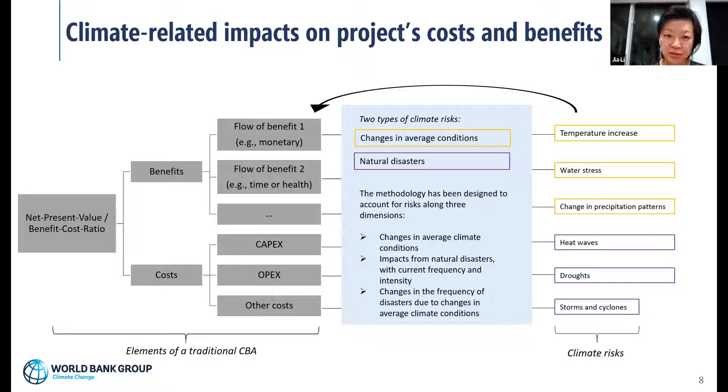All right, so this is just a quick flow chart that goes through the steps for the stress testing. Our starting point, as I mentioned earlier, is really the baseline economic analysis.

In analysis, oftentimes we do consider different assumptions, looking at an optimistic set of assumptions versus pessimistic, and evaluate the project's financial flows, costs, and benefits. And then we identify what are the climate risks and impacts and potential natural hazards that affect the project in this location that you will be developing.

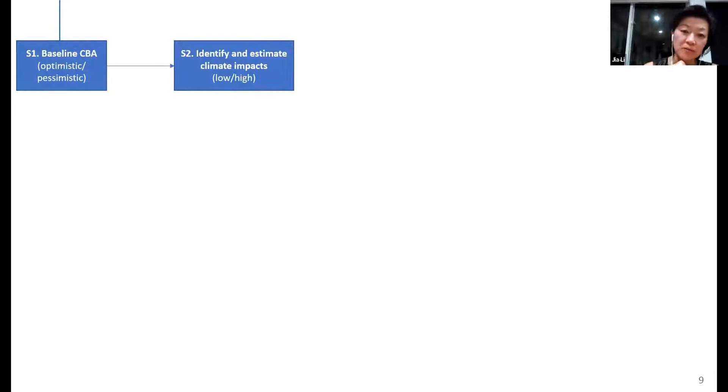Here we also consider a set of potential outcomes where the climate impacts can be low or high. As we look into the future, there are many factors that could impact the climate trajectory, including what countries are doing with their mitigation, and also socio-economic development and other aspects we can talk about. I will talk about the data assumptions we use for that type of analysis.

And then we calculate based on the climate impacts to the project cost and benefit categories. We calculate revised net present value or other criteria for evaluating projects for all the scenarios.

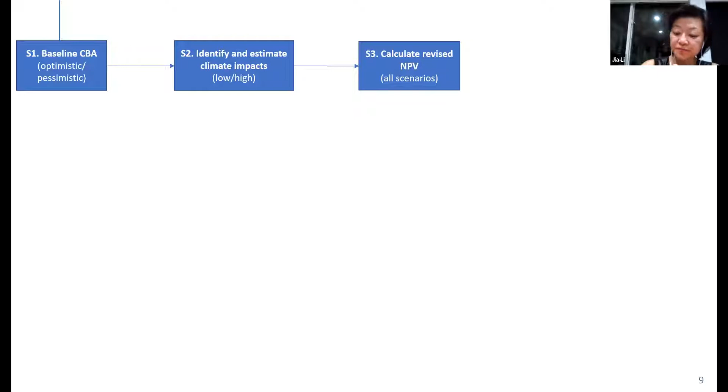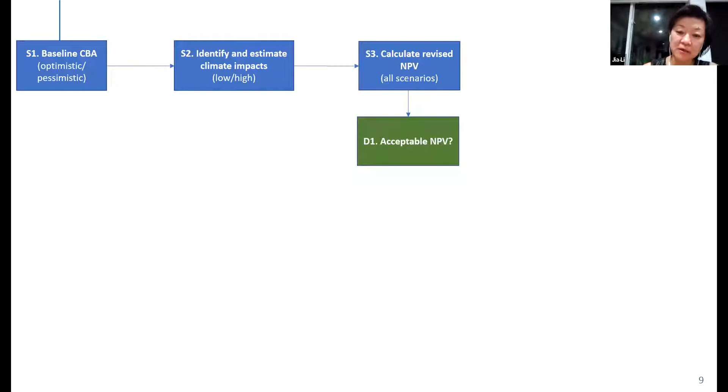And then we can do another set of evaluation to say, well, is this economic outcome acceptable? If it is, then we would conclude that the risks are acceptable when we consider climate change and future disasters.

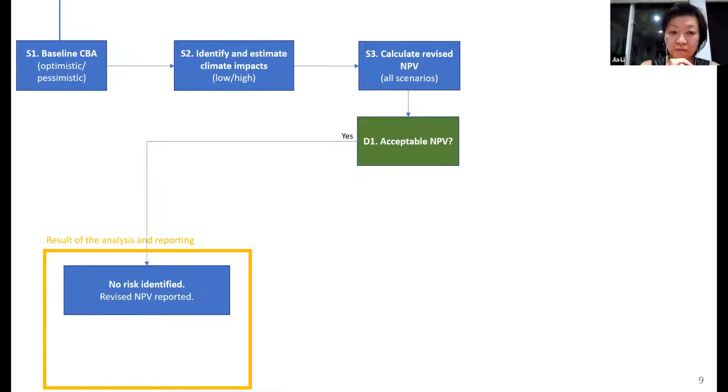And then at this point we will report the revised NPV and go on to the next steps of the project evaluation or design. And if the revised economic analysis shows that the outcome is not desirable, then we want to do further analysis.

To look at what are some of the scenarios that would actually cause the project to fail, and what are the potential consequences, and are these scenarios considered to be plausible, or the consequences significant enough that will require revision of the project.

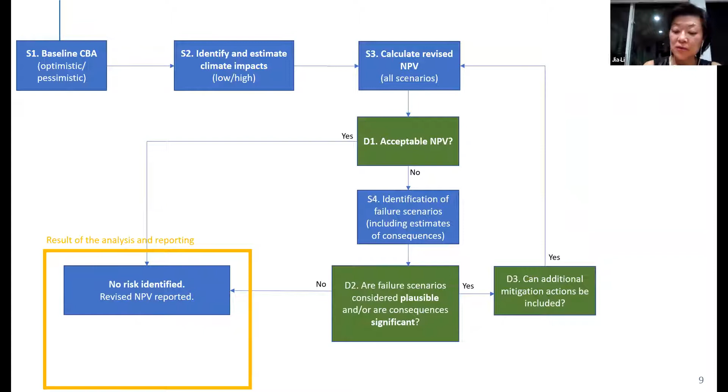So if the outcome is considered to be undesirable, then we want to go back to the design phase to reevaluate the project design. It could be the engineering standard, it could be the site selection, and consider the alternatives. And at that point, we will redo the analysis to evaluate project outcomes and go through this decision tree again.

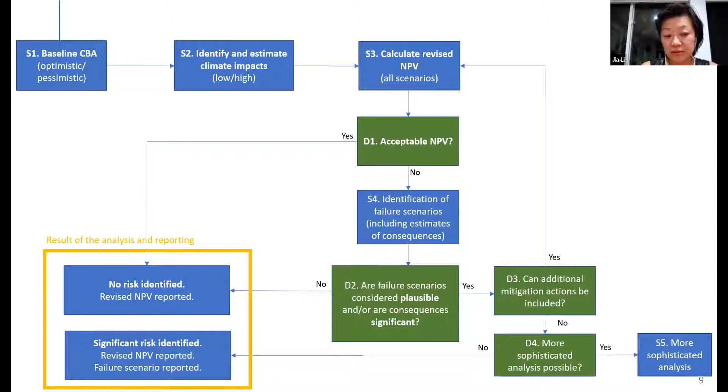So at some point, there could be significant risks being identified for the project, and in this case we might want to consider doing more sophisticated analysis. For example, for some of the large hydropower projects, there may be a need to do sophisticated decision-making under uncertainty type of evaluation, looking at a wider range of scenarios.

And we can also talk about that. That's not part of this methodology, but we do have additional methods being developed for considering more complicated cases as well.

All right, so we have the risk stress testing guidance note. We also have developed an accompanying simplified Excel-based tool to actually conduct stress testing for projects. This tool is a useful template or starting point to consider climate risks. It's possible your project has already been developing methods, tools, and data.

I'm sorry, there's a cat getting up very early.

But the template could be a useful starting point to consider different categories of climate change and disaster risks. And we do have a link in the presentation that shows you where you can find the tool and some of the training videos as well, that might be of interest.

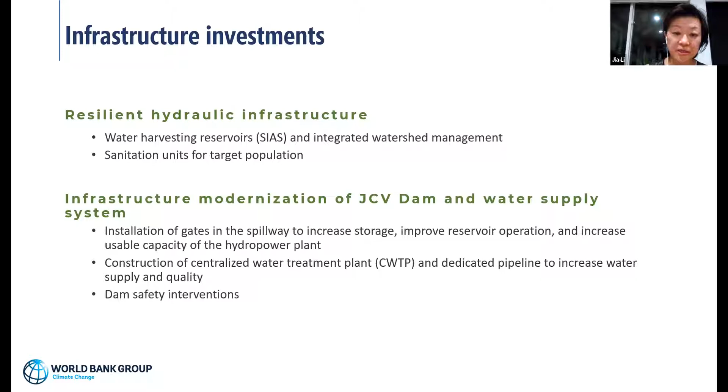So the infrastructure project has different components, and the project team already conducted their estimates of the costs and benefits. And so as a starting point, the baseline economic analysis considered both the optimistic and pessimistic scenarios.

And here we want to also consider climate then. So the climate risks for Honduras.

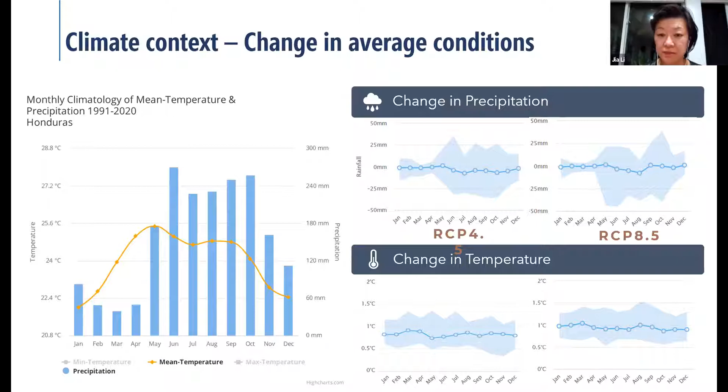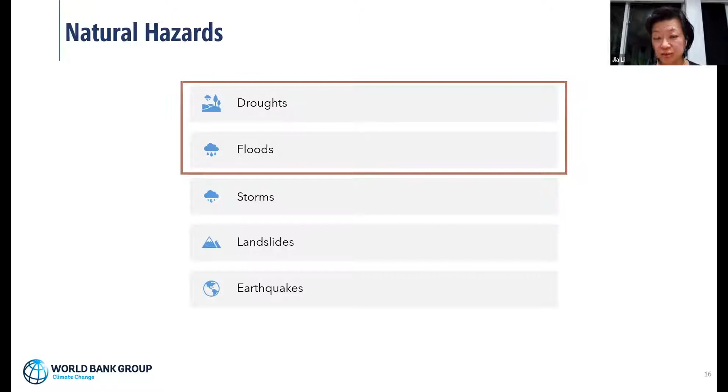So a lot of the information would be needed to support analysis. And for the natural disaster in Honduras, for the project site, we have major concerns about droughts and floods, so it is water variability.

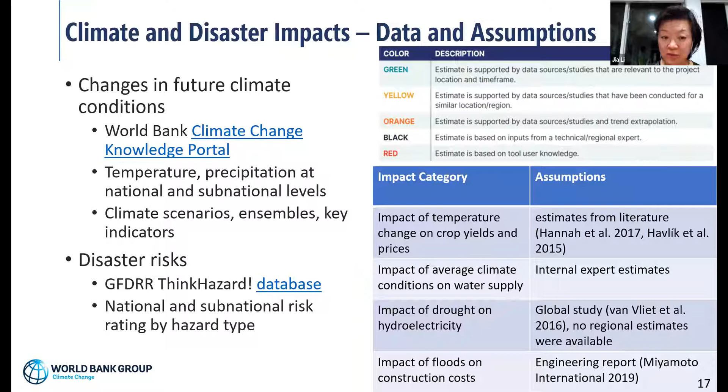And for disaster risks, the Global Facility for Disaster Reduction and Recovery has a really nice database called Think Hazard that really by country, for each country, there's a nice summary looking at the different level of disaster risks, which can be used to guide the analysis. So this exercise I'm showing is using data from both the Climate Change Knowledge Portal and Think Hazard.

So for changes in average conditions, we make a set of assumptions on what is the impact on the cost and the benefits, including the operating maintenance cost increase to the investment cost changes. And for the benefits, we also, as I mentioned, the set of assumptions we use to estimate potential changes in the project benefit flows from the income from agricultural production to irrigation, water availability and price,

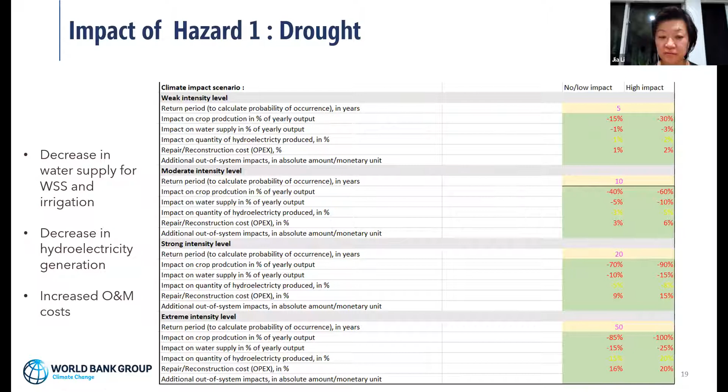So these are the assumptions being made. And this is looking to the future, when we project into the future, looking at the potential occurrence of disastrous events. We also have a set of assumptions that can be made in the tool to look at the impacts.

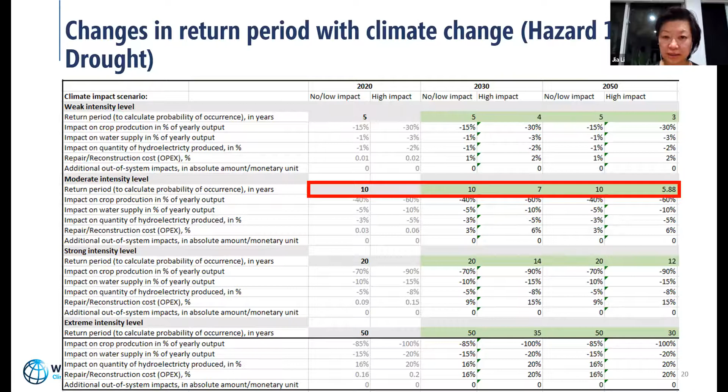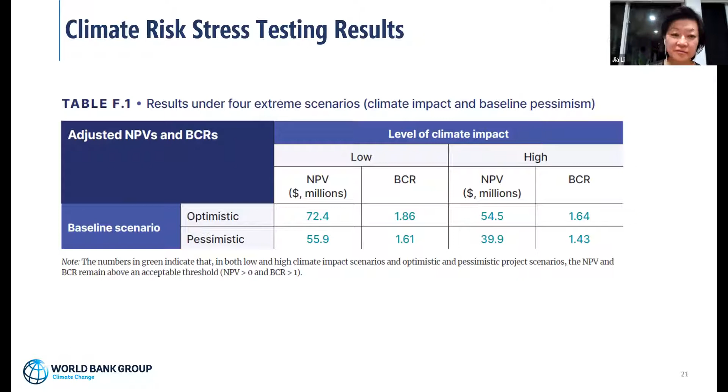So the tool can provide some analysis looking at the uncertainty space and where the project economics may become to be undesirable, which can help guide additional analysis and the project design modification.

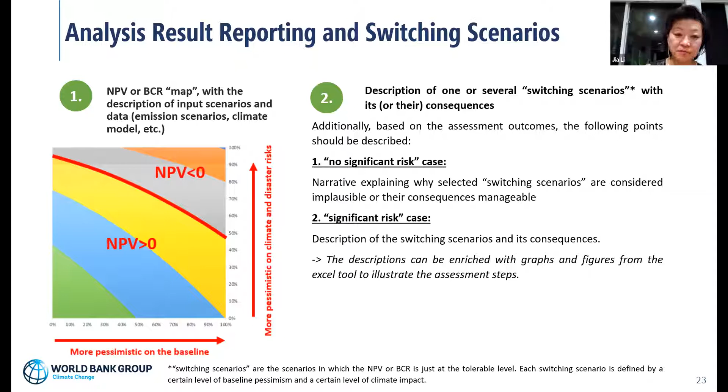Okay, I'm not sure how I'm doing with time because I couldn't see. Maybe David already sent me 5 messages to remind me.

So the key takeaway is there are large uncertainties in future climate potential events and their impacts. We don't know exactly how the climate will unfold, but what we do want to do is when we evaluate projects and do project design, we want the projects to be robust under any potential future conditions.

That's why there are benefits of doing stress testing to look at how the project will do under different conditions. We want to consider as wide as possible a range of future conditions to conduct the stress testing, and we also want to consider climate and disaster risks evaluation throughout the project cycle, from the beginning, from project design to analysis, evaluation, and also implementation, monitoring and evaluation.

Those are all very important because future conditions will not be stationary, and we want to make sure the whole project design is also adaptable, considering anticipated future conditions.

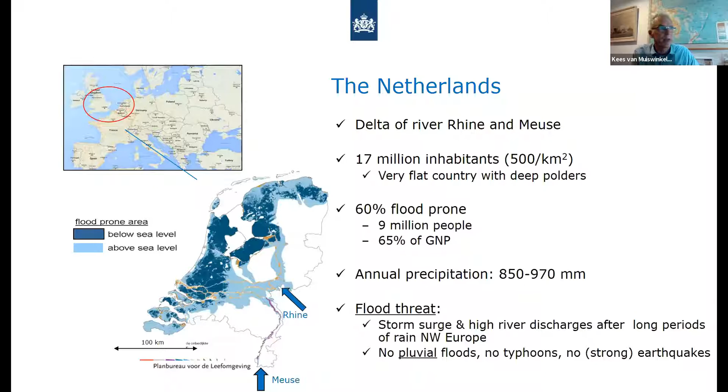We have been used to live with the water for ages and ages, and large parts of our country have been reclaimed from the sea, as you can see in the picture on the left, on the top. This also means that we have been used to floods, major floods, with a lot of losses.

And this led to some important projects. I will tell you a bit about that later. For example, in 1916 there was a major flood leading to the building of the Afsluitdijk, and we had the big flood in 1953, which led to our famous Delta works.

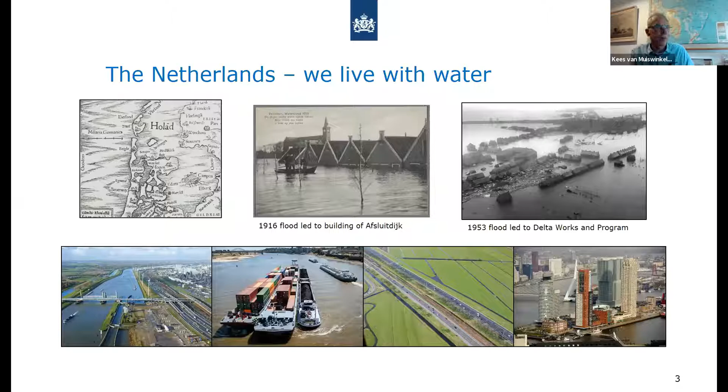But it's not only a challenge, we also love the water. We live with the water. It's very important for our economy, for the harbors and in shipping. And we also like to live along the water and have recreation. So it has two sides to it.

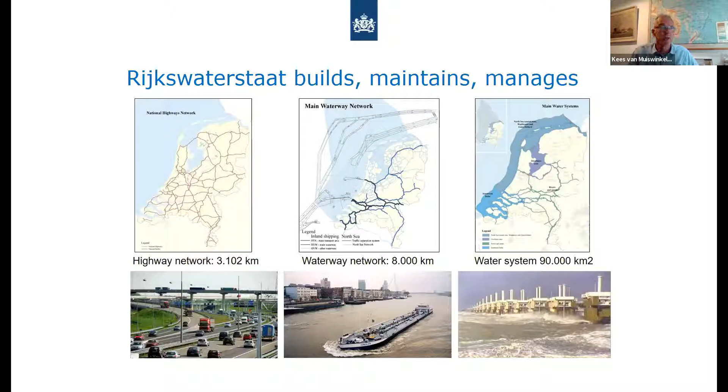I work for Rijkswaterstaat, which is the executive part of the Ministry of Infrastructure and Water Management in the Netherlands. We build, maintain, and manage the highway network, the waterways, and also the water systems, which include the storm surges.

While doing this, we have to deal with an uncertain future. We don't know how the economy will be, or politics. And we'll all agree that nobody could have predicted what the impact of, for example, the COVID epidemic would have been.

Also, mobility in general is evolving. There are a lot of technological developments also with mobility. And in some ways it can make us more dependent on electricity and telecom. That means we may also be more vulnerable to climate change, because that causes extreme weather.

So how do we deal with that in the Netherlands? Well, we have climate change adaptation policy, and I'll touch on that a bit. We have the Delta program, which obviously also came from this 1953 flood.

Very important is water safety, because we are largely prone to flood. We love to be safe, so we like to reduce risks. For water, this means we deal with storms, and also, obviously due to climate change, we have to deal with sea level rise and higher river discharges.

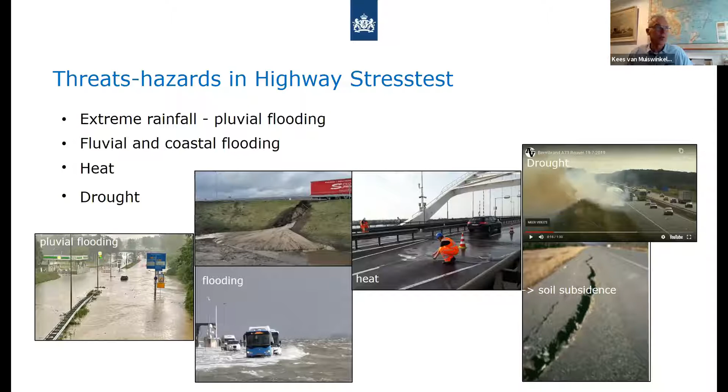For example, the effects of extreme rainfall, which can lead to flooding of the road, which you can see on the left, but also erosion of embankments, which can cause damage to our roads. The possible impacts of flooding, both from the rivers and from the coast. Heat - we had record heat last year, which caused problems with bridges that wouldn't close, meaning problems for both road traffic and shipping. Drought can lead to fires along the road, and in the long term will cause more soil subsidence, which also causes a lot of damage to our infrastructure.

So this is what we look at, and this leads to maps. It's great to have these stress test results, because at the beginning of a project, you know what the challenges are. We've also investigated different scenarios. So starting a project with these stress test results helps stakeholders think about these challenges and think about the measures.

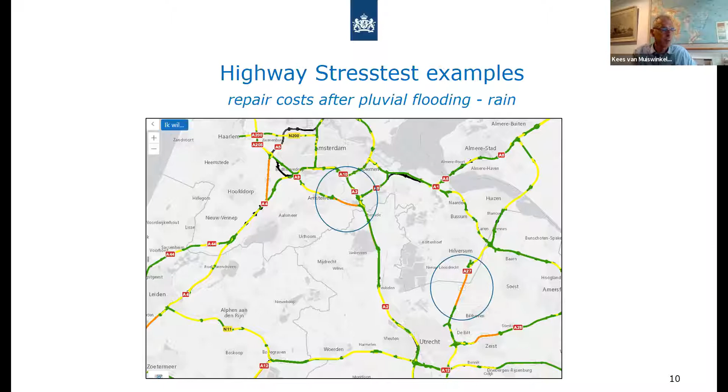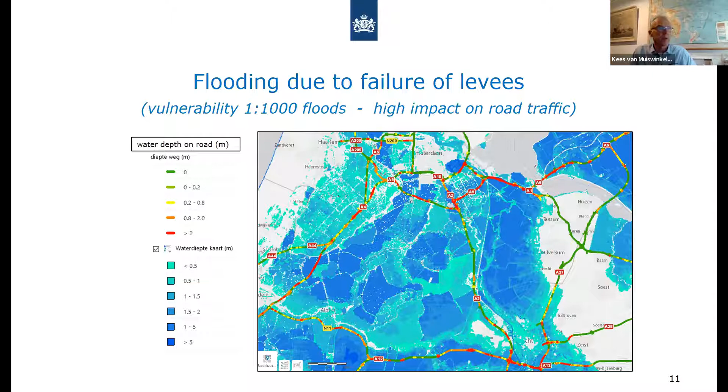I told you about these risk dialogues - with our limited budgets, we want to put our efforts where it's most important. So through the stress test and the assessment of risks, we like to focus on issues that have a high probability and a big impact.

For example, these steel bridges that wouldn't close due to heat have a huge impact, so we want to take measures focused on that. On the other hand, flooding on the roads happens a lot, but the impact is less big because it only happens for a couple of hours and the water just runs away. So the stress test and the dialogues help us make these choices.

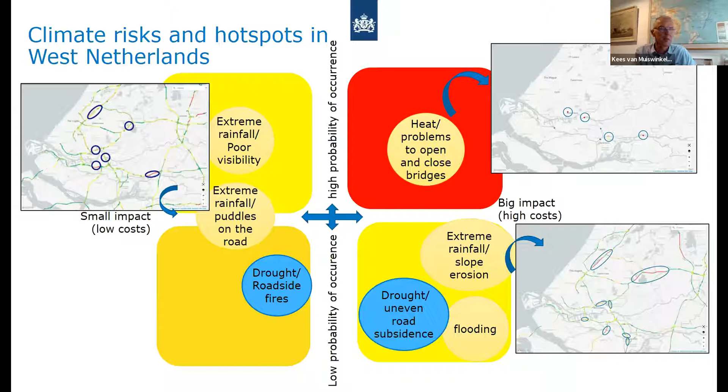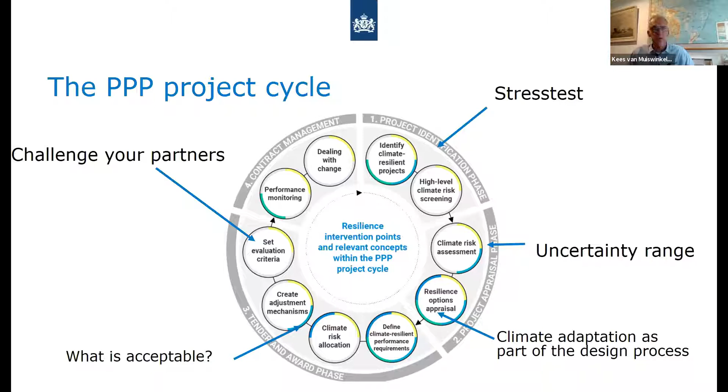Now, how does this relate to the PPP project cycle, which you can also find in the handbook you're studying this week? I'd like to tell you about this. I think this really shows how our system relates to this PPP cycle. I'd like to touch on some aspects of that.

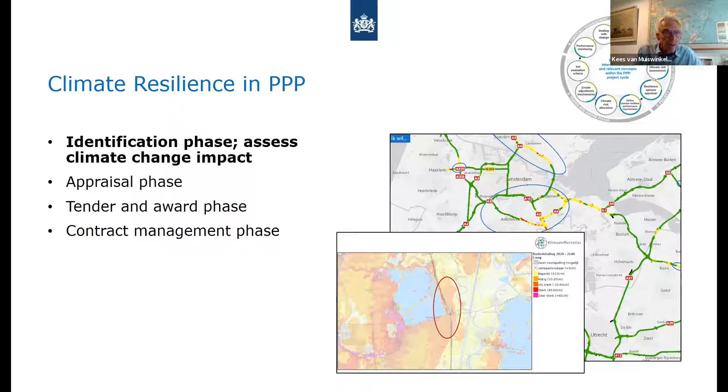Firstly, in the identification phase, the stress test helps show where the risks are. This doesn't mean there are no uncertainties - obviously there are - but by having the different scenarios in the stress test, this helps as input for the appraisal phase. Then next is the appraisal phase, where you actually look at what sort of challenges there are and what possible measures exist.

It's good to have best practices and lessons learned, and they are widely available. I think World Bank just told about that, but worldwide there are lots of best practices. It's really good to use these best practices, which will help you think of better solutions.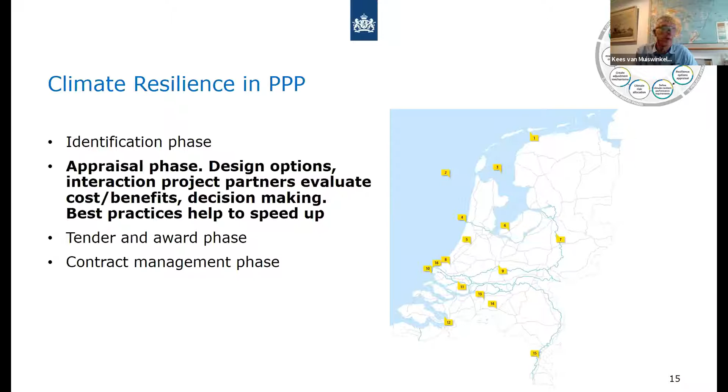In this map you can see Rijkswaterstaat iconic projects, which shows where projects take into account sustainability and climate change adaptation. I will tell you about some examples later on.

In the tender and award phase, it's important to challenge the contractors to innovate, to think about adaptive solutions. And it's very important to tell what will be the standards where you will evaluate the projects. So if you set these standards, this will help to achieve the goals you have set in the appraisal phase.

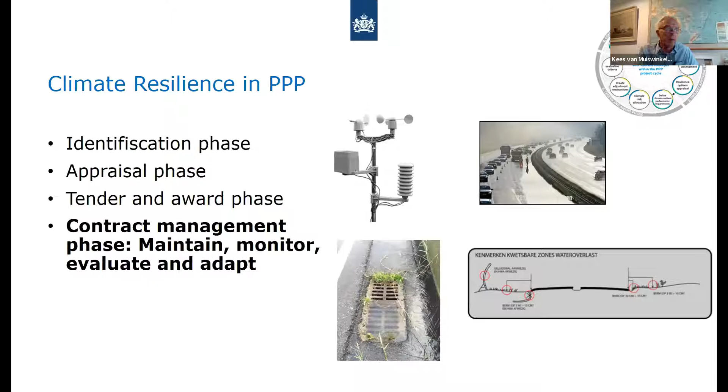Starting now, I would like to give some examples of how we take into account climate change adaptation in the Netherlands and how we deal with projects.

This is an example of the A1 motorway, which is very near to Amsterdam, a pretty part of the Netherlands, but also very busy. On the left you can see the old motorway with a bridge over the river, and you can imagine this caused problems for traffic - it was too narrow, so it caused a lot of traffic congestion. On the right you can see the detour of the motorway which was made without a bridge - they actually made an aqueduct with concrete under the river.

This obviously helps accommodate more traffic, but at the same time we took into account other interests like shipping - less obstruction for shipping - but also ecology. There's an ecological route on the lower part of the aqueduct, a part which is now used to accommodate all sorts of animals traveling by.

We also took into account climate change - we have more precipitation, so we designed to account for all the extra water that comes off the road. This also helps with water management of the area, because as you can imagine, all the fields you can see are actually below water level, so water management is very important. All these interests are taken into account in this project.

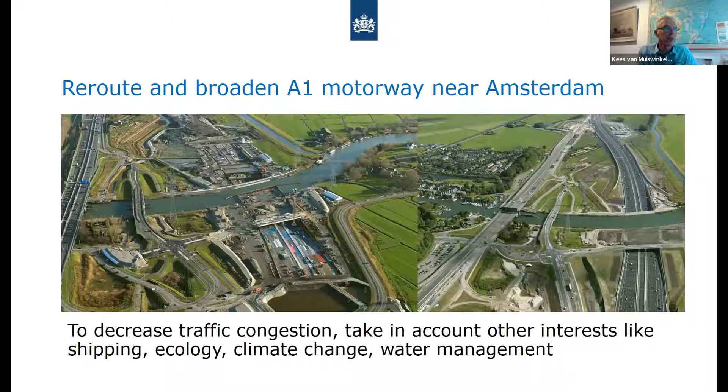Next, I will tell you about the Afsluitdijk project. It's a 32-kilometer long dike, which was built after the 1916 flood, and it has been protecting large parts of our country for 90 years now. But after 90 years, the dike needs regeneration to meet up to the safety standards.

By 2050, it has to meet the Water Act, which means it will have to accommodate a 1 in 10,000 storm. And because, as I told you, a large part of our economy is in flood-prone areas, we don't want to flood, so that's why we have these high standards.

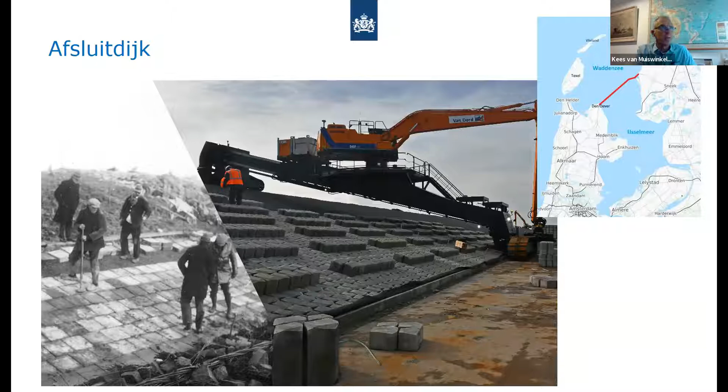So at the moment we are working on this project, and there are 3 ways in which we accommodate for the future. First, we reinforce the dike to meet a 1 in 10,000 storm. You can see it is highly improved - there are innovative concrete blocks which will accommodate this storm, and in this way it will not be a problem if the water overtops the road, because it will not damage the dike.

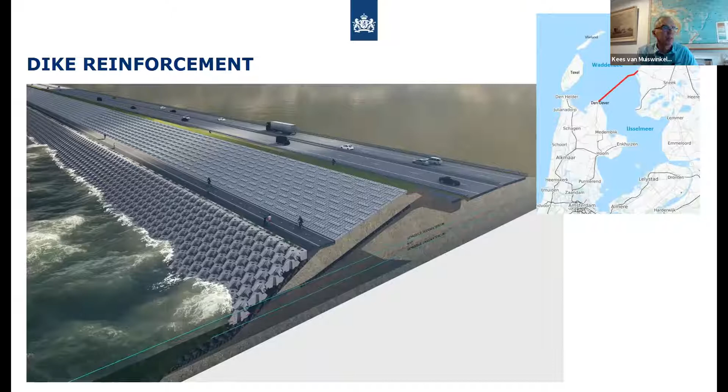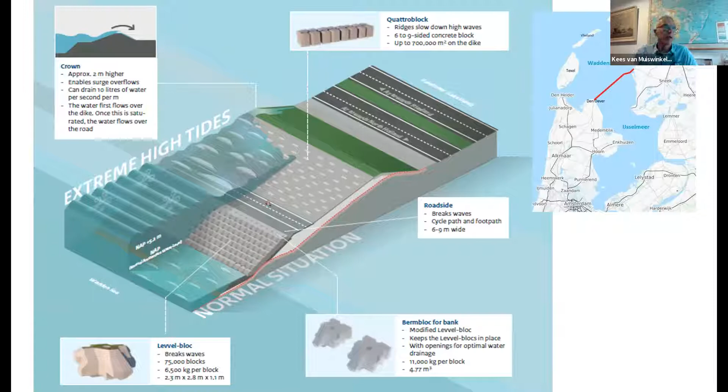Here you can see these innovative concrete blocks, and this will accommodate it. In general, the dike is 2 meters higher than it used to be.

Another thing which is very important is that we need to be able to discharge more water, because due to climate change we have more river discharge. And you can imagine, combined with sea level rise and also storms, it can happen that the water cannot be discharged from the IJsselmeer to the sea. So 2 extra discharging sluices were built, and also 2 extra pumping stations.

On this picture you can see why - you can see on the 3 diagrams below that, for example, if the sea level is higher than the IJsselmeer, we actually lower the gates.

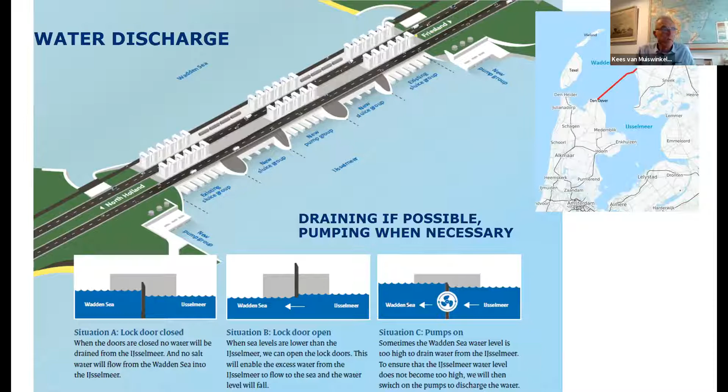With low tide, we can put up the gates so the IJsselmeer can discharge its water. But during long periods of storm, and with sea level rise, it will sometimes be very difficult to lower the IJsselmeer to the desired level, which may cause floods along the lake. For that reason, we have also installed pumps, so we can adapt to these changing conditions and climate change.

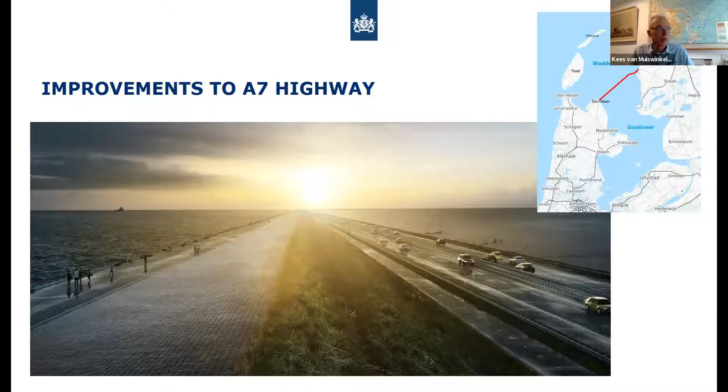At the same time, because it's not only a dike but also accommodates an important motorway in the northern part of our country, we use this regeneration of the dike to improve the roads, meeting current standards for the motorway, since the old road was also quite old and needed improvements. This shows the new design of the road, which meets the new Dutch standards.

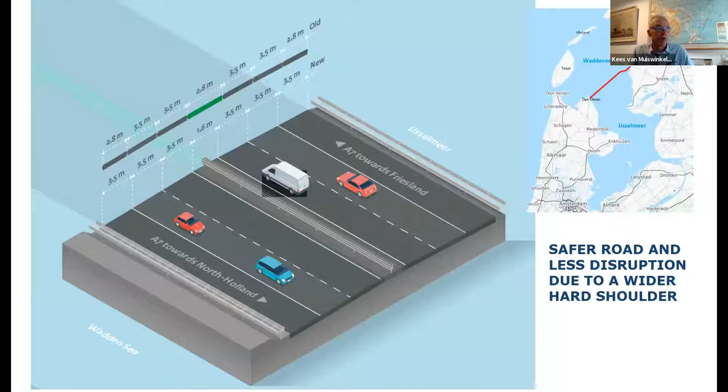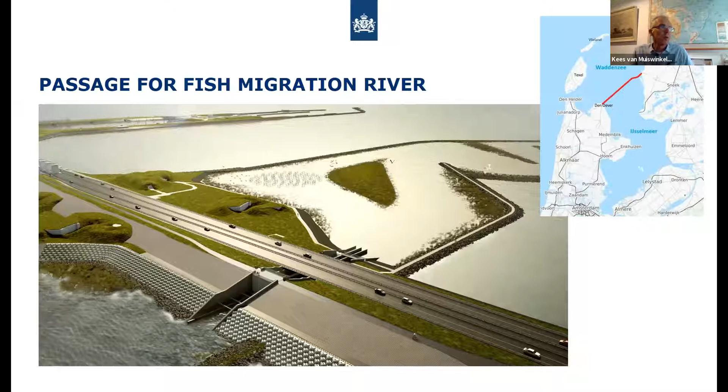Lastly, we also take into account the interests of nature. The dike, as you can imagine, is a barrier to fish like trout and salmon. So a new facility is being built to accommodate fish migration, which will also increase nature value. On the next picture, you can see an aerial view, a diagram of this fish migration river, which will allow fish to swim through the dike without causing problems for the safety of the dike.

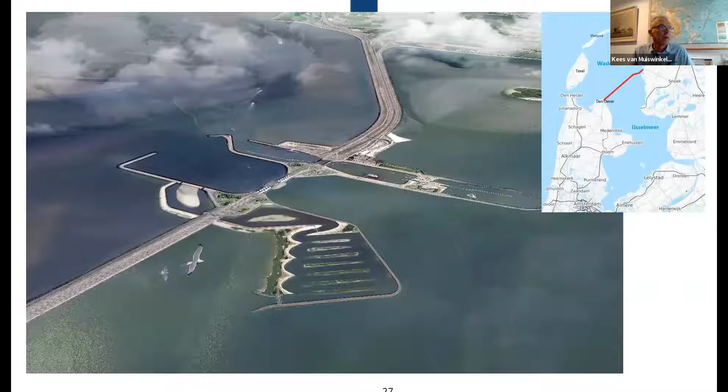The work is still in progress at the moment. The strengthening of the dike, and the building of the new discharging sluices and pump station, will be finished by 2023, and the total project will be finished in 2025. This is done in combination with all regional partners, government partners, and also with a company doing all this work.

So it's really an icon project, and if you come to Holland, please come and see it. The last example I'd like to give is another dike, also in the IJsselmeer.

I'd like to show this because it's a nature-based solution design. As you saw with the Afsluitdijk, we used concrete to reinforce it, because nature-based solutions were not feasible there. But this dike, it was - and it also had to meet the new water safety standards.

Instead of concrete, we used sand, which we dug out from the lake on the left. On the right you can see the road, which is also important. This dike has been strengthened with sand on both sides, which works really well. We actually use a lot of sand in Holland to keep our water safety in shape, instead of building hard dikes. It's actually cheaper, more flexible, and also good for nature.

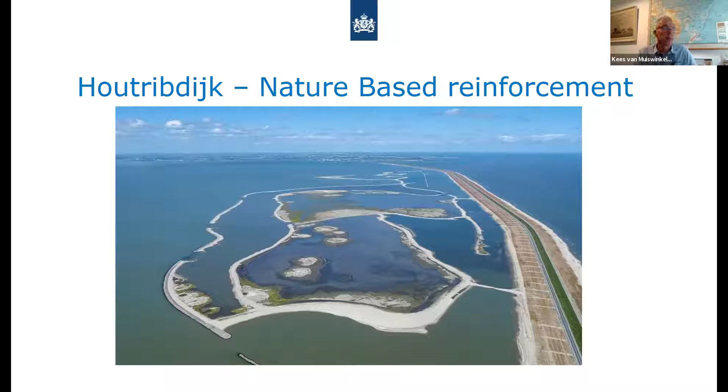Just to finish off with some conclusions. I've told you about some examples, and there's much more to say about this - feel free to ask questions. I think I've tried to show that when you look at this PPP cycle, it's important to address resilience and think about possibilities for resilience in all phases of a project, starting with identification all the way to maintenance and management, but also all the phases in between.

Data and knowledge is very essential, and this can be done on different levels. In Holland we have a lot of data available and are very advanced in calculating risk, but even with limited data, there are lots of possibilities and tools available - you need to know how to calculate the risk and think in advance. We've also learned it's good to challenge partners and contractors to think of innovative and adaptive solutions, especially for climate change adaptation. It gives better solutions, and it's also good for companies to bring in their knowledge and innovations.